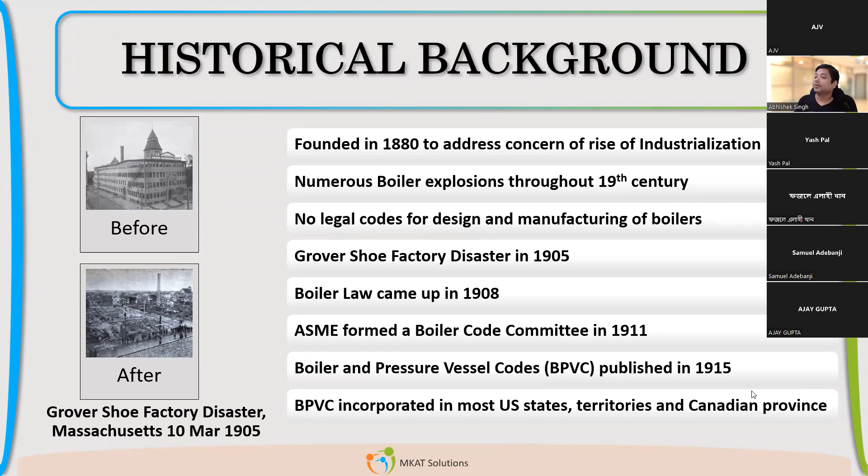Now let us come to the different ASME codes which we are following now for different applications. Section 1, like we discussed, was the first code created, and that was for power boilers. So what is the main difference in boilers? We can also design by Section 8 Division 1. Can anybody tell the main difference between Section 1 and Section 8? Boilers can be designed by both of these codes, but if you read the name of the code itself, it will clarify.

So Section 1 is for fired boilers, direct firing, where firing happens inside the vessel. Yes, very rightly mentioned, Munendra. Section 1 covers direct firing. Section 8 is for unfired boilers. The firing will be outside, like a combustor will be there, and from there the hot gases will be taken in for steam generation. So that is the main difference. Power boilers are designed with Section 1.

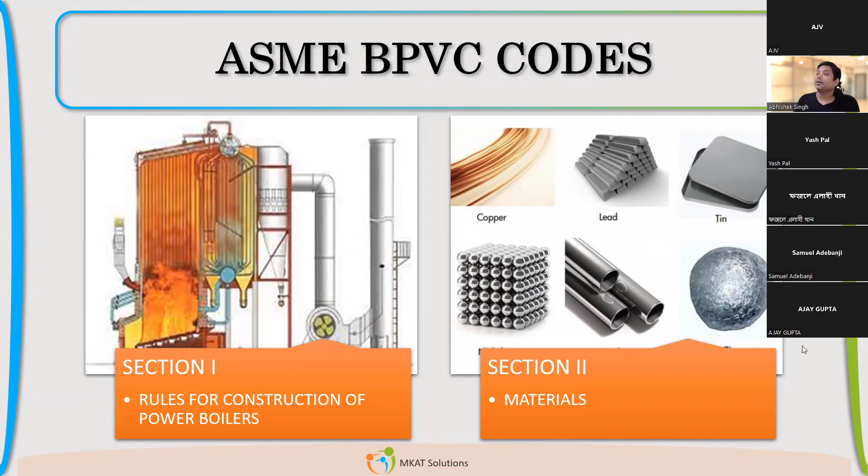Now comes section 3, which also has lots of different classes. There is NB, NC, ND, NF, lots of different classes based on where that part is associated in the nuclear island. If it is completely in the core, then it will be NB. So requirements are also similar to that. If it is NB, that will be more stringent. If it is NC, ND, it will be slightly relaxed.

Section 4 was also generated long before, because that is related to heating boilers. In cold countries, there was always the problem that they wanted room heating arrangements. So this was started for that purpose. Now it is even used in industries also. But the start point was to keep your room heated, in Canada and European countries where there is a very cold climate. So they use these heating boilers to heat their full building.

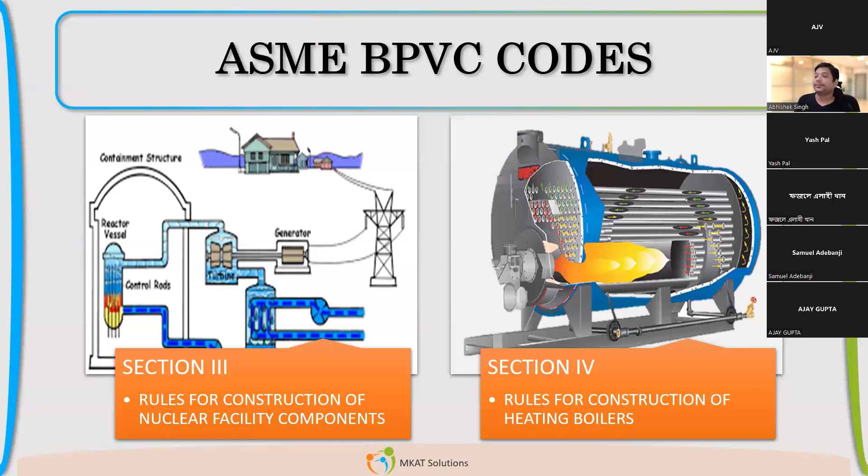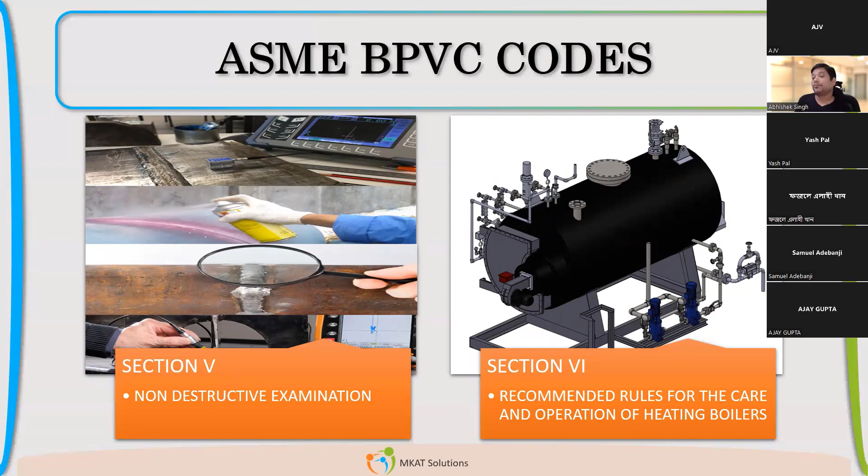Section 5, we talked about, is non-destructive examination. The procedures, how to do LP, how to do RT, all these procedures will be mentioned in section 5. Section 6 is about recommendations on how to take care of your heating boiler, the section 4 which we talked about, design by rule. It recommends what operations we should perform to keep that operational. Section 7 is about the same thing, caring for power boilers.

Section 7, not very widely used. If you are using section 7, maybe at that time you may have to refer to it, because it's for very specific applications. Normally what we follow as an industry in oil and gas, petrochemical, pharma, all the different industries, is section 8, the most widely used code. Section 8 also has division 1, division 2, division 3, three different divisions. Division 3 is very rarely used, but in nuclear we have even used division 3.

Very high pressure. That was a 12-meter dia spherical vessel for nuclear purpose, so that was designed as per division 3. But other than that, you have used division 1 or division 2 all the time. Division 1, you can say, is design by rule. Design by rule means we can calculate the thicknesses by available formulas.

We can make an Excel sheet, or on the notebook, we can calculate all these formulas.

Division 2 has two parts, part 4 and part 5. Part 4 is governed by design by rule, part 5 is by design by analysis. So we have to perform a numerical analysis using different software, but mostly ANSYS is the software which most people are using.

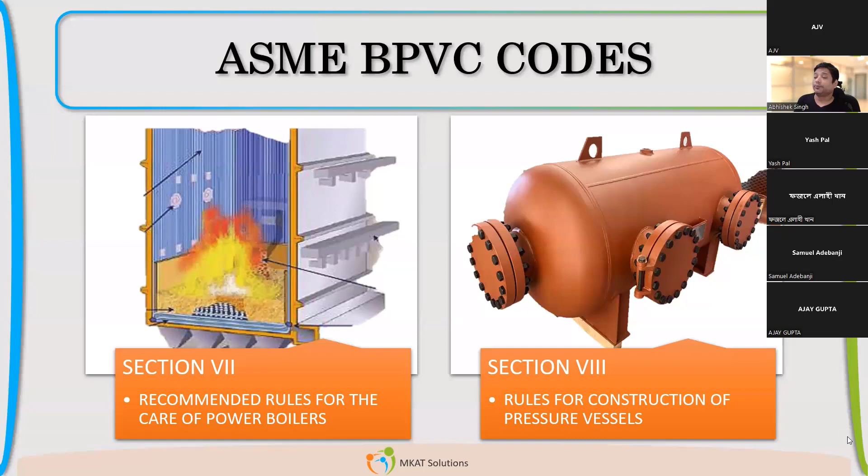That is section 8, the most widely used code. Our next webinar will focus on how it is constructed, what are the different sections in it, and how division 1, division 2, division 3 are differentiated, what is the main basis. We'll keep engaging with you and try to have these kinds of seminars regularly.

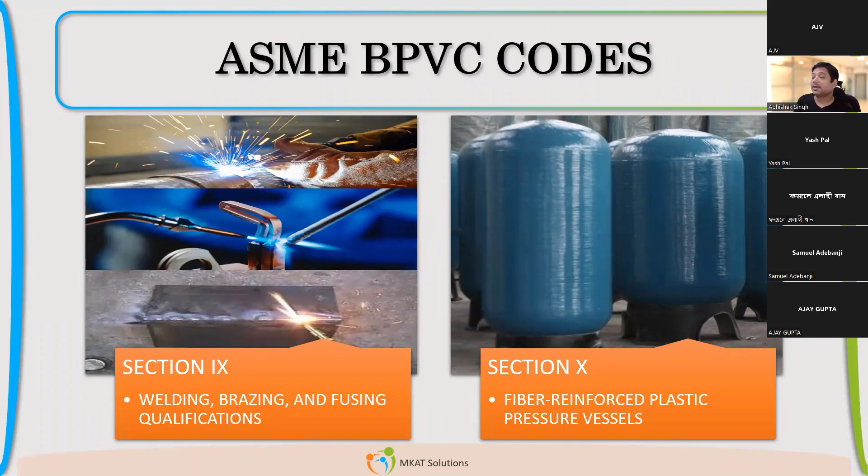Section 9 is related to welding, we all know that. Section 10 is very recent - when fiber reinforced plastic pressure vessels started, this section came into the picture.

Section 11 is for nuclear in-service inspection. If you are doing in-service inspection of a nuclear power plant, the set of rules you will see are in section 11.

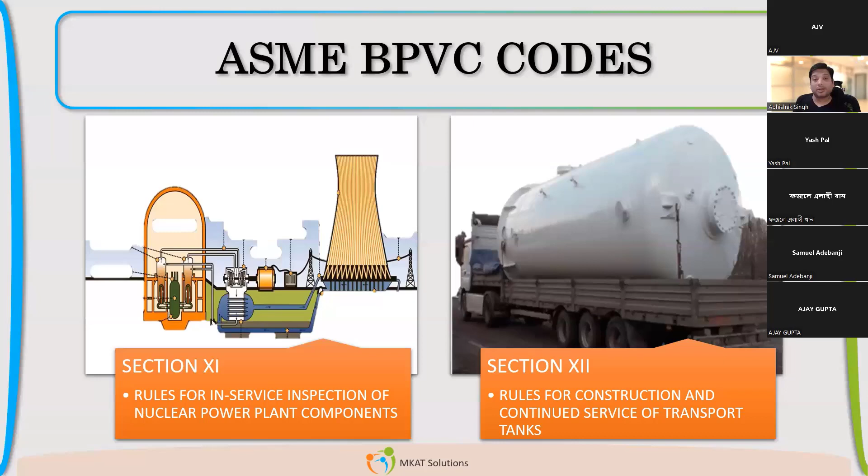Section 12 is for transportation - whatever fluid you are transporting, you may have seen the bromine tank, these are the tanks used for transportation. There are certain rules related to that. If you have to design a tank to be used for transportation, you have to follow section 12.

Then there is section 13 also, a rule for overpressure protection. We use these devices in case of a surge of pressure, if the pressure exceeds what we intended because of some failure - in a power plant, failures are meant to happen. You have to provide a system to take care of that. If some failure happens, how to tackle that? It should not become a catastrophic failure generating explosion or fire, so to prevent that we follow lots of systems. Section 13 is related to overpressure protection.

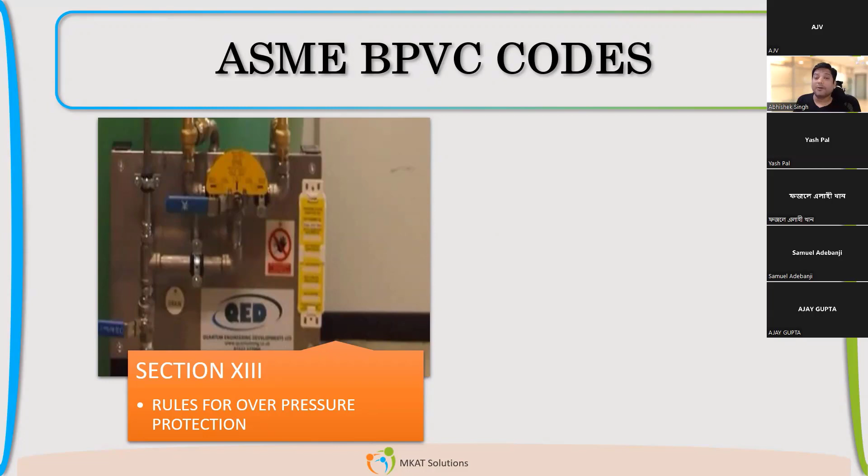These are the 13 codes of ASME, and I have explained the different uses of it, the different sections where we use them. Most widely used is section 8 division 1 - almost 95% of the time you will be using section 8 division 1 in day-to-day life. Even in the nuclear island, many equipments which are outside as a utility are all designed by section 8. So in the plant you may have some specific equipment related to section 1 or section 3, but there will always be equipment related to section 8. That is how section 8 division 1 is important.

So key benefits - definitely the code promotes the profession and passion of a mechanical engineer trying to formulate different rules to take care of any problem. If you face any problem, try to see where it originated, what went wrong, and then modify your code accordingly. It's a continuous process.

Lots of facilities it provides, like trade becomes easier. It also improves the quality of your component if you follow a particular code, because quality is the topmost focus of these codes. Lots of benefits are there, and definitely it's a kind of gift to us as mechanical engineers - a book of all the knowledge compiled together and given to us. It's a blessing, so that is our Gita and Bible and Quran for a mechanical engineer. All the set of rules are there.

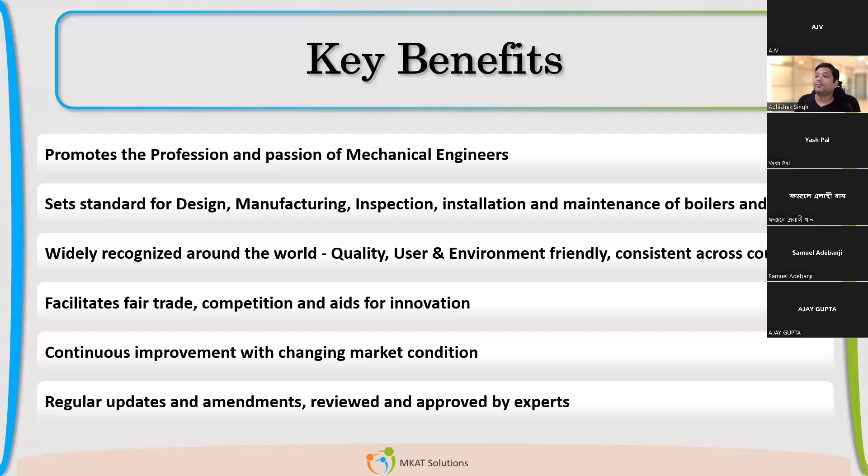We can refer to it anytime, and we can give advice and guidance to others if we understand that code. If we are able to understand these parts, it will be really helpful for us in the long term, because we can explain things. Only knowing the software part of it - many times people focus on that, saying 'I only need PVElite software, I want to learn that' - but only learning the software will not help. You have to understand the code as a design engineer. That is the main job of ours, to read and understand different clauses, and there are lots of clauses. You cannot mug up all that - for certain applications you may have to refer to certain ones. So it's a journey which you have to follow and keep on learning. That is the main intention.